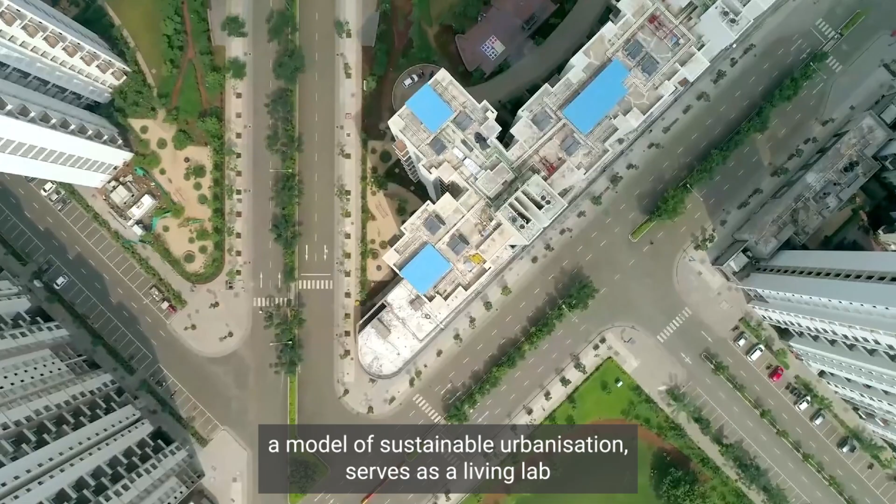Our Palava City, a model of sustainable urbanization, serves as a living lab for the accelerator, enabling innovative and scalable market-based solutions. The thriving community of residents experience about 2 degrees cooler surroundings, 30% lower energy footprint.

Together, let's build a prosperous net zero carbon future for all.

Hi, good evening everybody. I am On Abdullah. I'm from India's second largest real estate company called Lodha. We are a full spectrum real estate developer, all the way from residential, commercial, industrial, and data parks.

Palava is our flagship city development. I should start with why we have built this project. 15% of global growth is coming from India, and India's growth is leading us into an unprecedented scale of urbanization. We expect that close to 100 million households will become home ownership capable in the next 10 years, so it is going to unleash a level of urbanization never before seen in the world.

But urbanization brings carbon emissions, urbanization adds to climate risk, and it also adds to the challenges in energy security. So we have to build in a manner that we can sustain it.

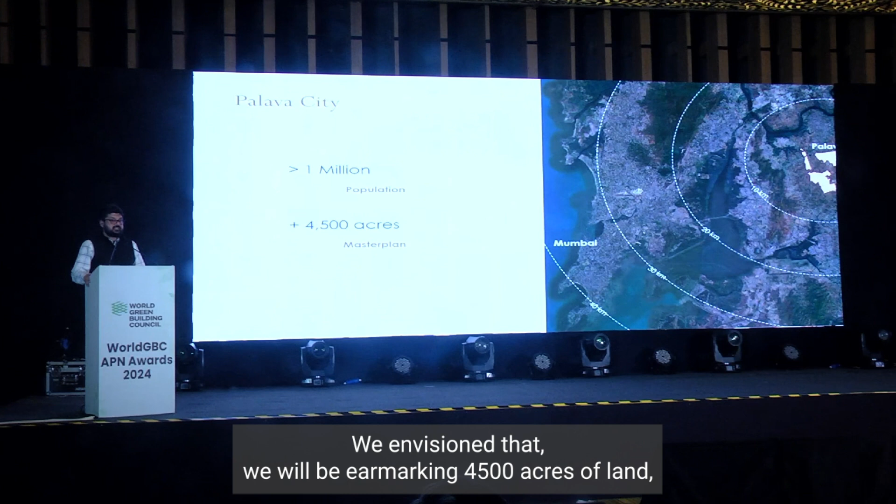The city had to be a template for India, and a template cannot be a small project, so it had to be big. We envisioned that we will be earmarking 4,500 acres of land, and the ultimate population of the city will be 1 million. We have already completed a few initial phases, and the current population in the city is 200,000.

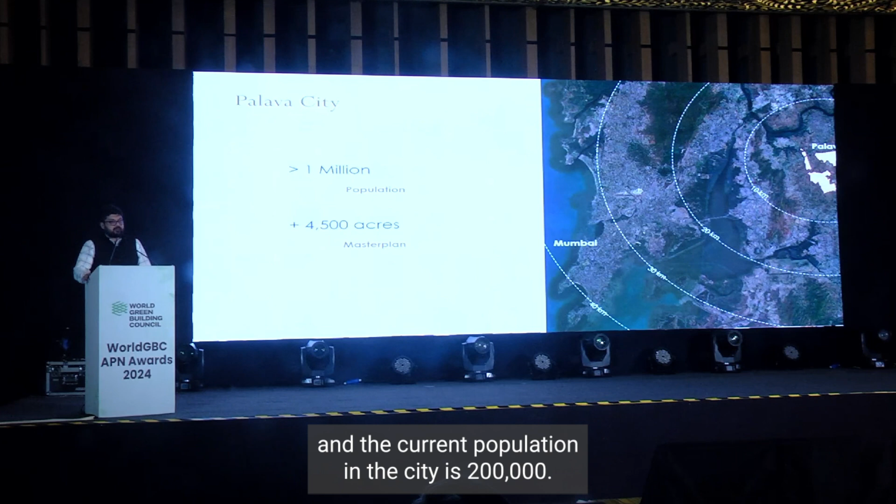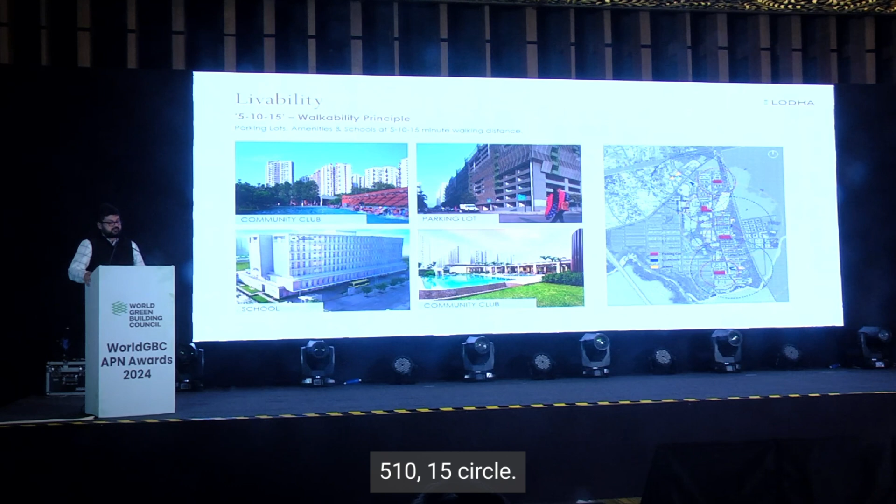So these are some photos of the city. It shows how the neighborhoods are planned. They are all within this 5, 10, 15 circle. Each circle comprises close to 4,000 to 7,000 homes.

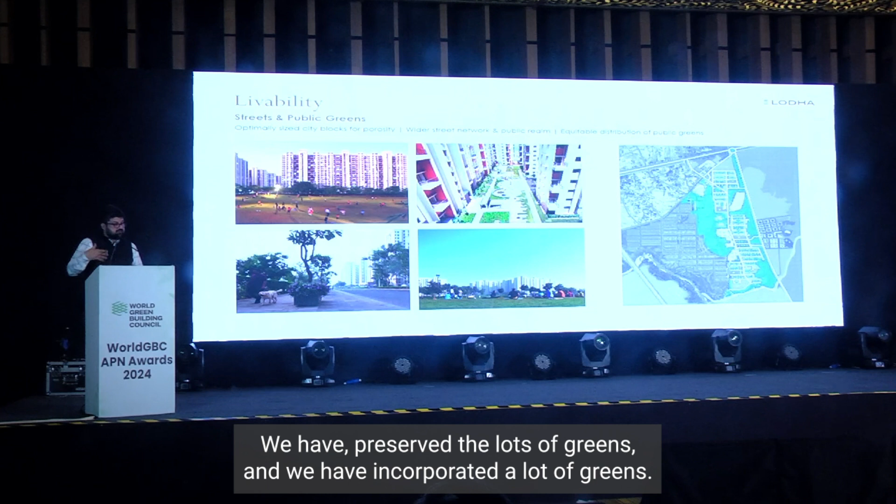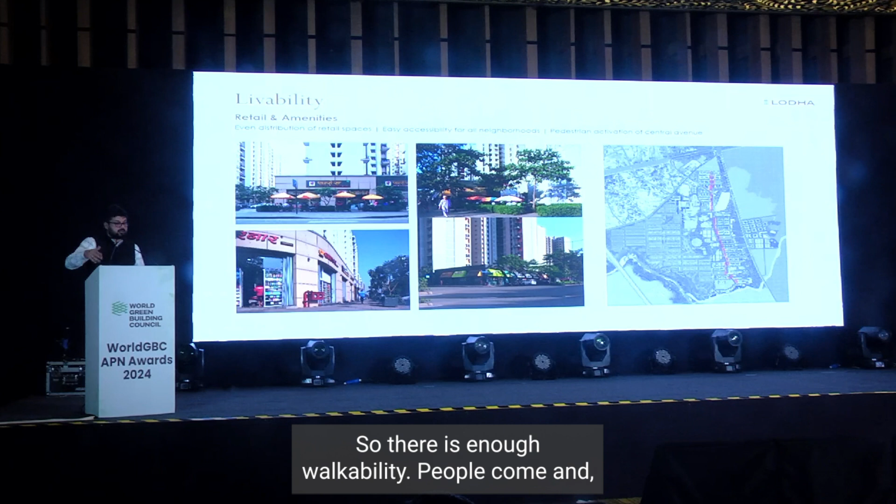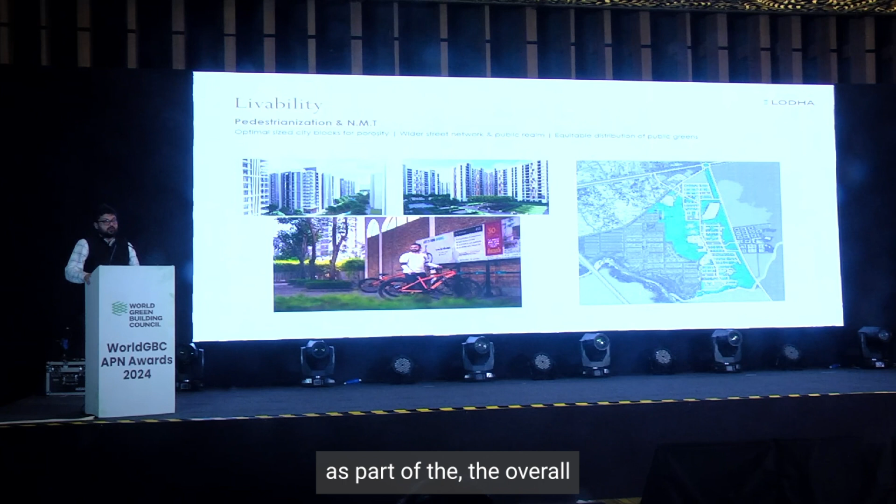There are lots of greens. We have preserved lots of greens, and we have incorporated a lot of greens. The retail is also interspersed all across the city, so there is enough walkability. People come onto the vibrant streets. There is shared mobility, non-motorized transit corridors as part of the overall city design.

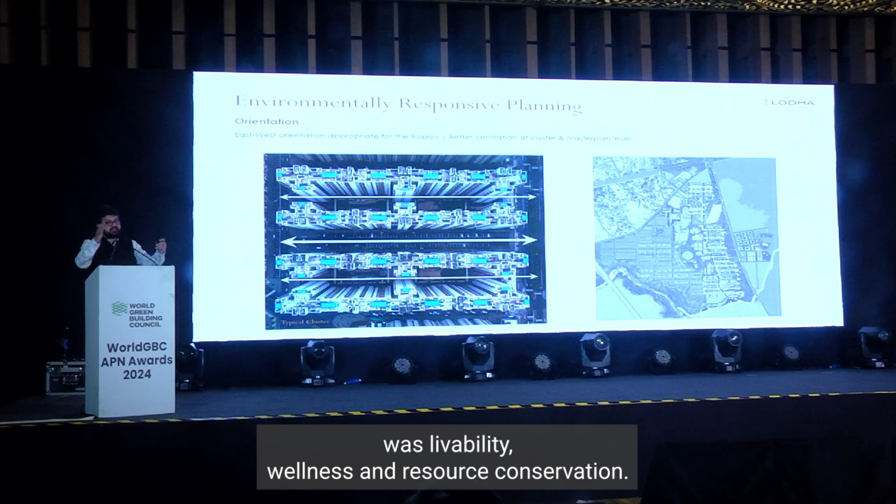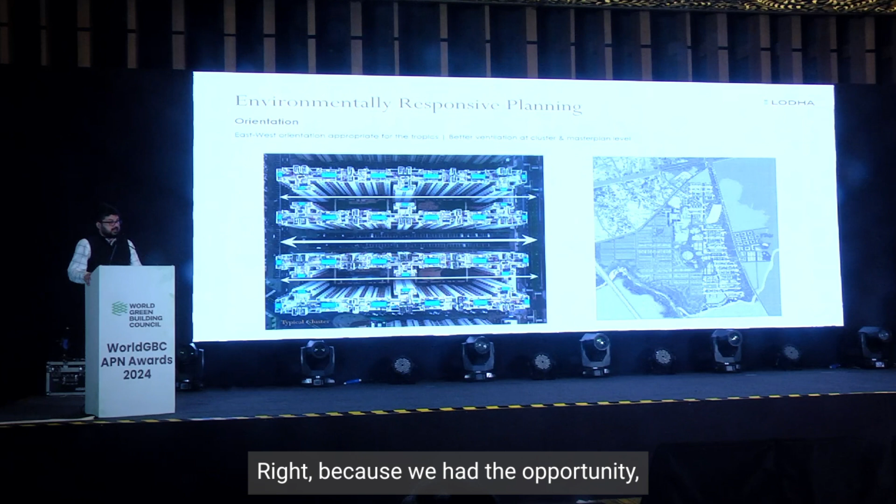As I said, the initial focus on sustainability for this city was livability, wellness, and resource conservation. In resource conservation, the primary thing is passive design. The whole city is oriented right because we had the opportunity, so there is a lot of passive shading also on the streets as well as within the courtyards.

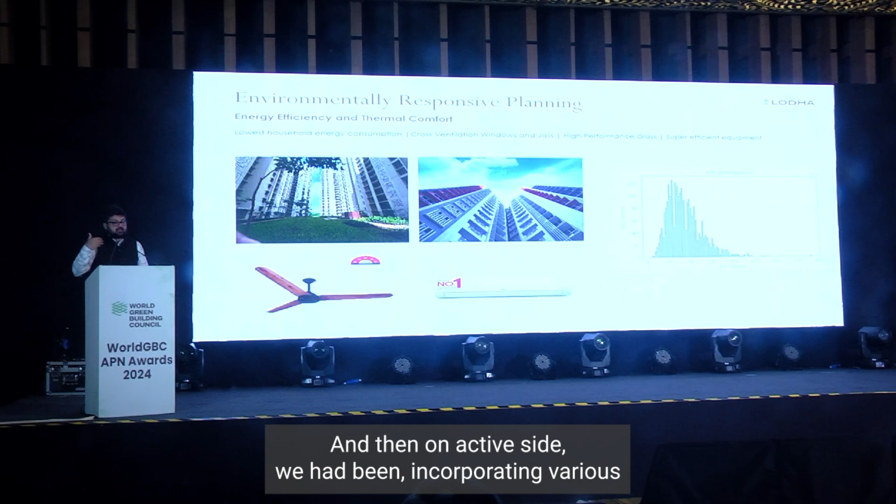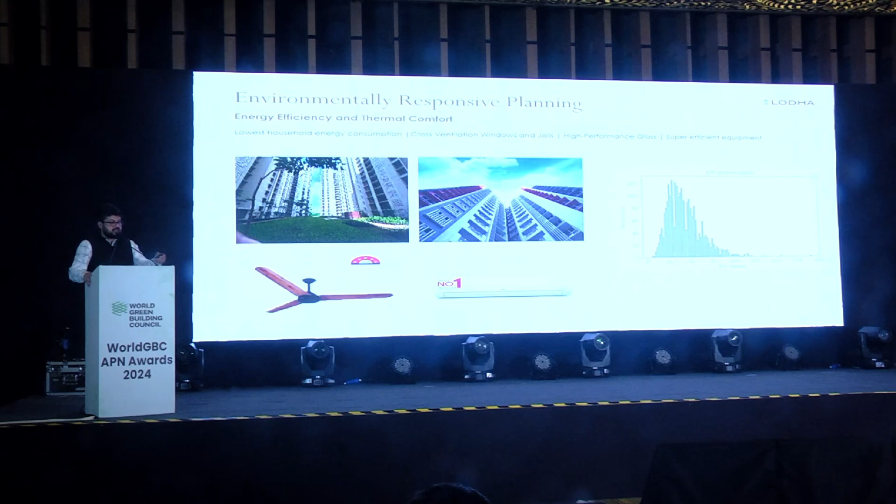On the active side, we had been incorporating various elements, passive and active, including giving super efficient appliances even in affordable homes, which has led to a very impressive energy use profile within the city. A typical home in Palava has a median EPI of 40 kilowatt hour per square meter per year, which is quite impressive, and we are still trying to push it down.

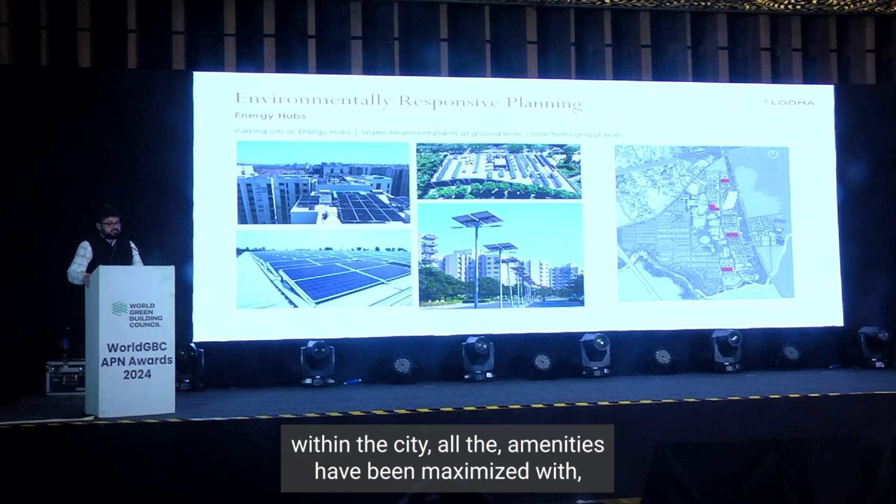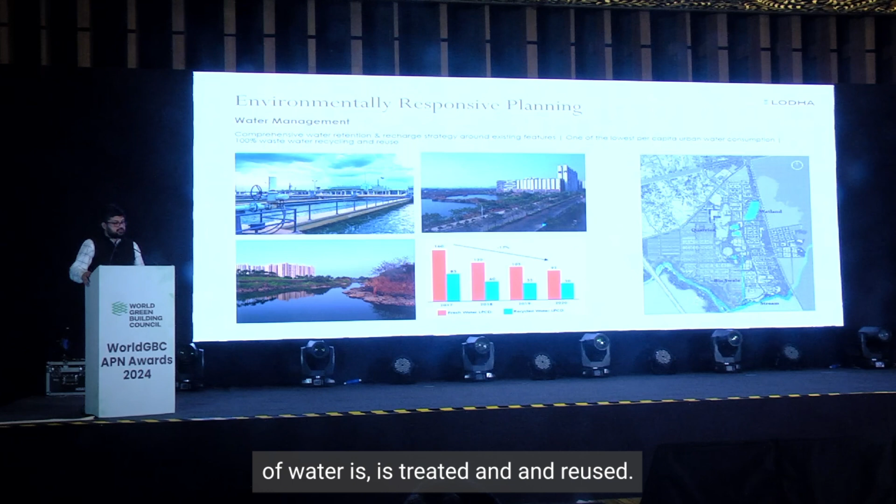There is a lot of solar within the city. All the amenities have been maximized as energy hubs. 100% of water is treated and reused. We have also protected the existing wetlands and lakes. The water is also metered, and the data is conveyed to the customers.

The entire waste is also handled within the city. Beyond this, we also have lots of arts and culture incorporated, and lots of social infrastructure through schools, sports facilities, etc. And then obviously we have a top-notch city governance, where the citizens are also involved.

But 4 to 5 years back, we came together with RMI. They are a US-based think tank on climate and energy. And we started to redefine sustainability for Palava. In this redefinition process, we brought climate risks as central, and we created a strategy built on resilience and decarbonization, basically handling adaptability and mitigation, physical risks and transition risks.

And what it led to was, it added a few parameters which were originally not in our agenda, like embodied carbon reduction, like use of climate risk data and so forth. So these are the newer things that came into how we design.

And we then decided that we'll form a net zero urban accelerator, which will use Palava as a living lab to come up with this information that can guide how urbanization is done all across. And the data is available for everybody.

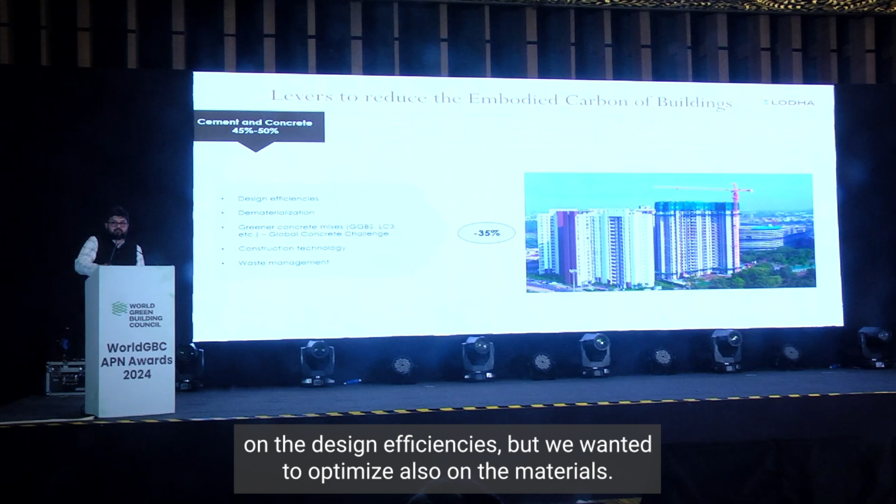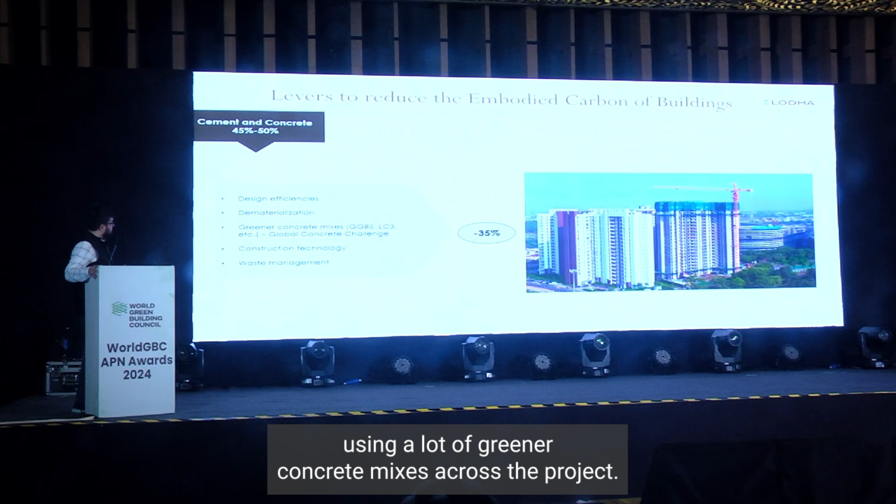We started working with our supply chain. We had already optimized on design efficiencies, but we wanted to optimize on materials too. So we started working with our supply chain, and we have been using a lot of greener concrete mixes across the project, and we are also exploring certain construction technologies which help us dematerialize and bring the carbon down.

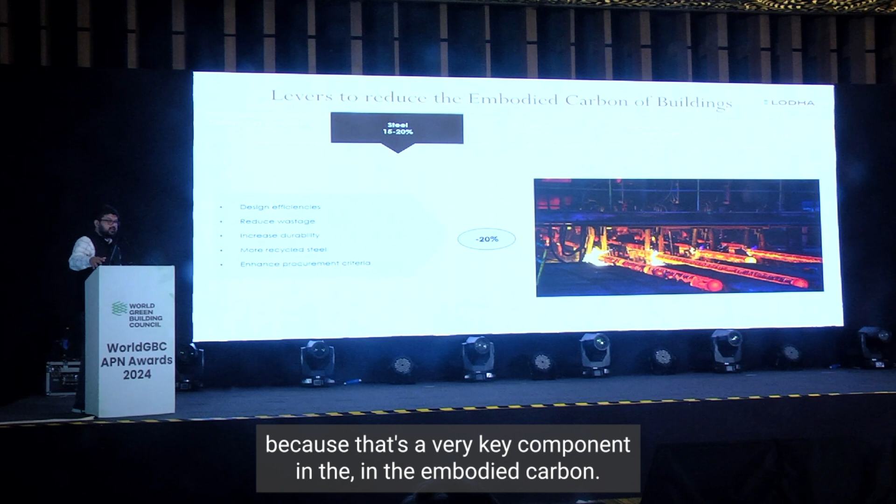We have been working with the steel supply chain as well, because that's a very key component in embodied carbon. We have a paper on this also, if interested people can see. India has a very data-scarce, opaque supply chain, so we are working with all of them to bring them on board on this decarbonization journey.

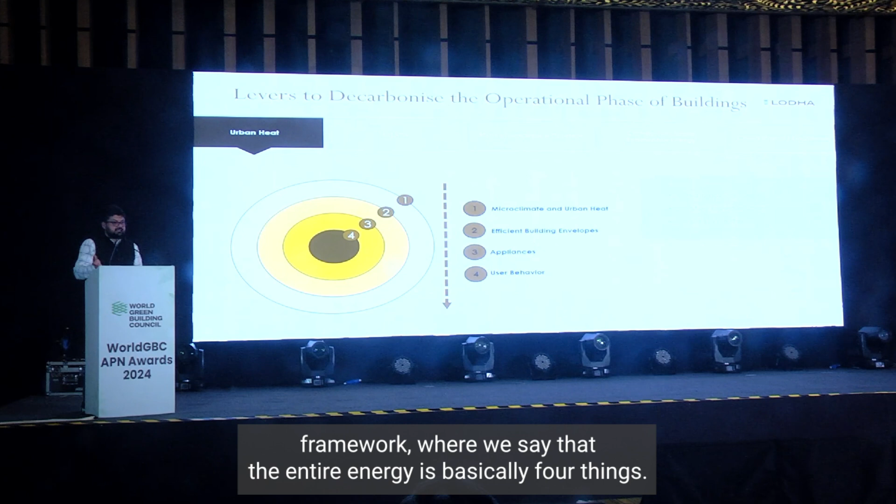On the operational side, we created our own 4 concentric circle framework where we say the entire energy is basically 4 things: the ambient, then inside the ambient it's the envelope, inside the envelope it's the equipment, and behind the equipment is the user. So if we are able to attack all of these 4 areas, we can bring down the energy needs.

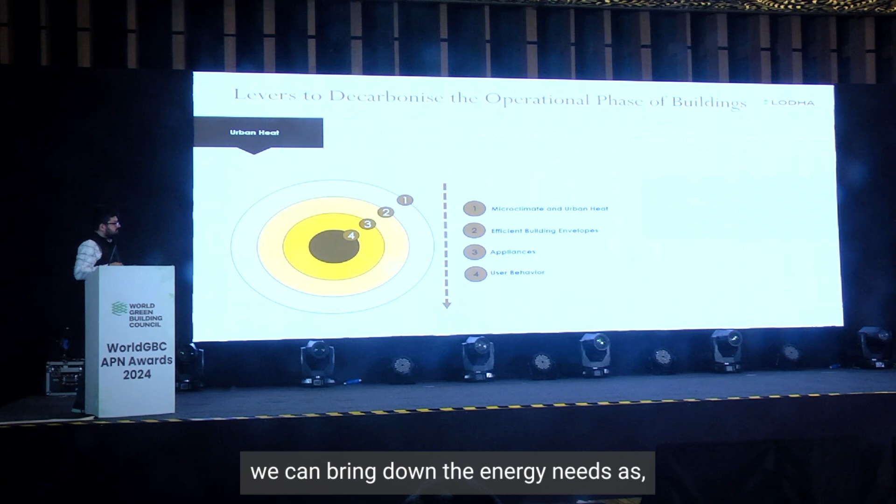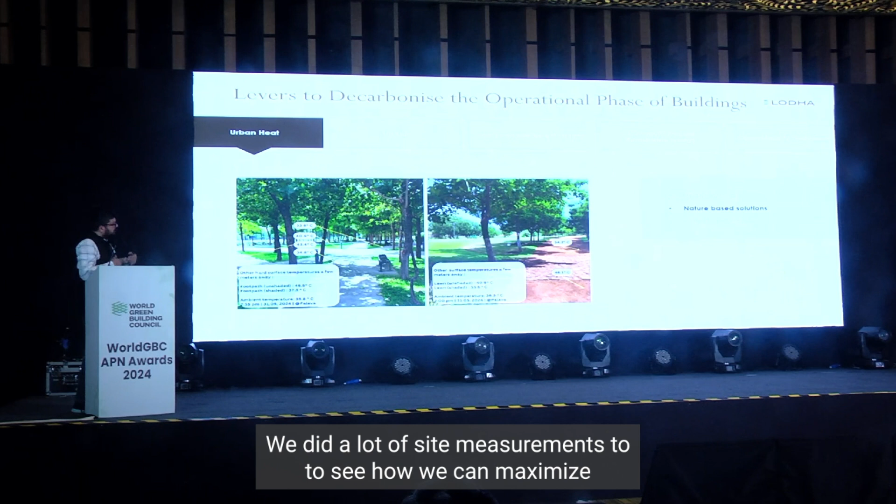So we started with a heat mapping exercise. On the left side you see Palava, on the right side you see the nearby development. It's 3 degrees cooler than what it was before. We did a lot of site measurements to see how we can maximize the right materials to beat urban heat, and how we can have more lighter and more reflective surfaces within the city.

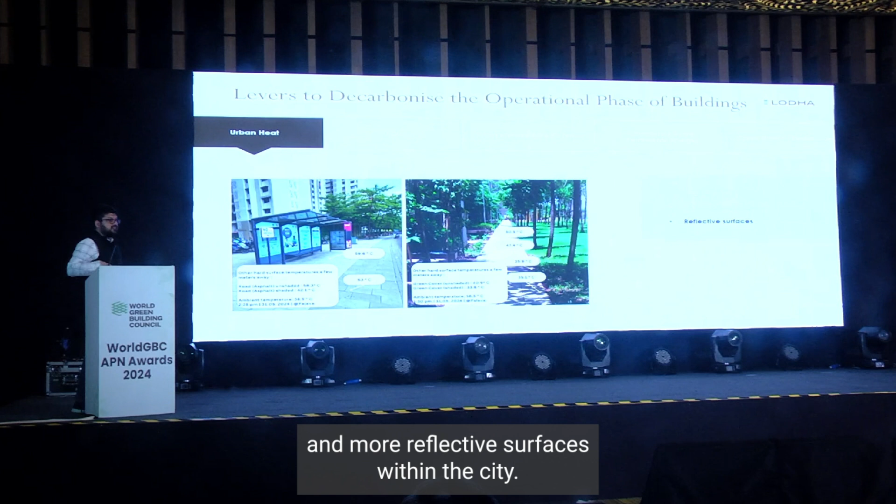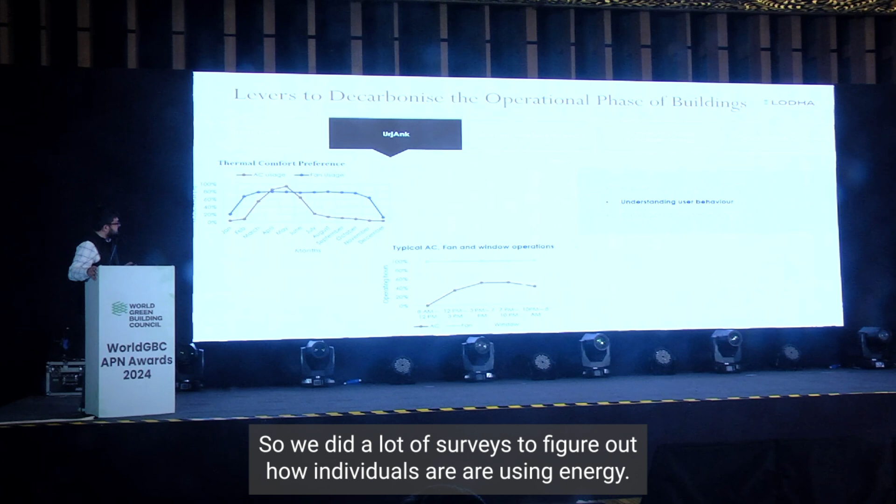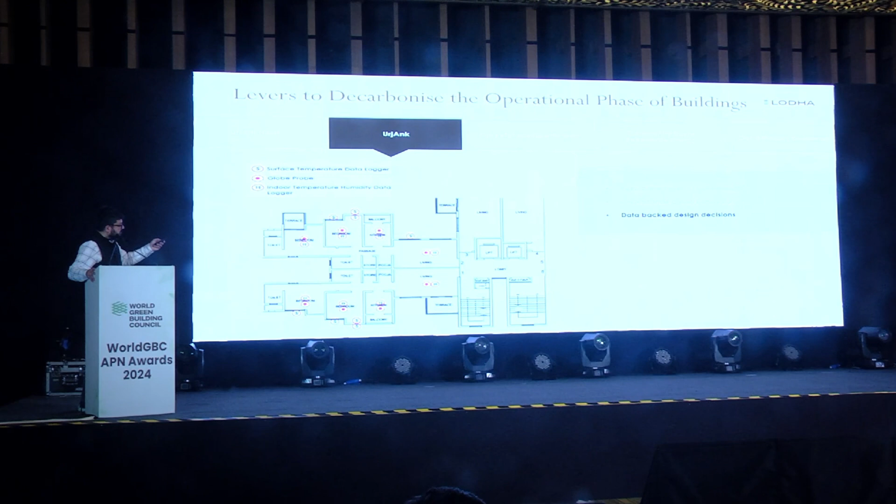We also started to understand how people use energy. So we did a lot of surveys to figure out how individuals are using energy, and then how that can be brought back into how we make design decisions. This is a sensorization of an active apartment where we are really trying to understand how much is going into cooling, how much into heating, and so forth.

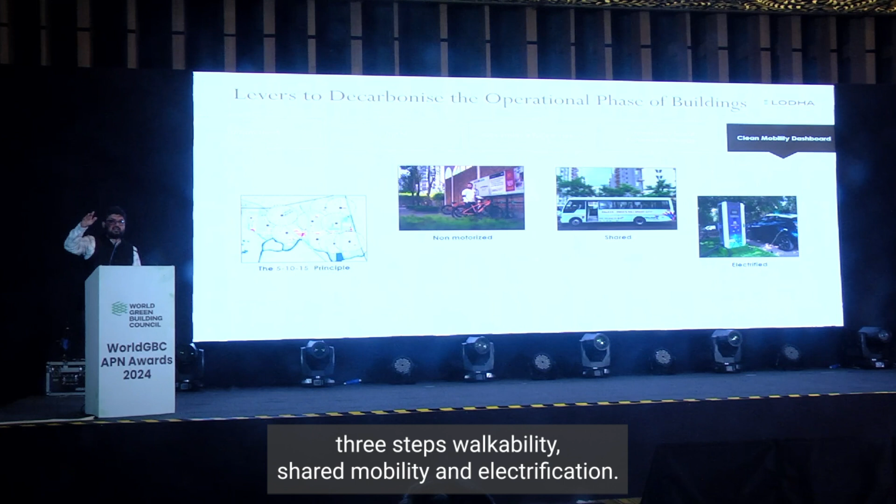We are trying to do community solar integration. We already have close to 10 megawatts of solar within the city, and we are further expanding. Our mobility strategy within the city is basically 3 steps: walkability, shared mobility, and electrification.

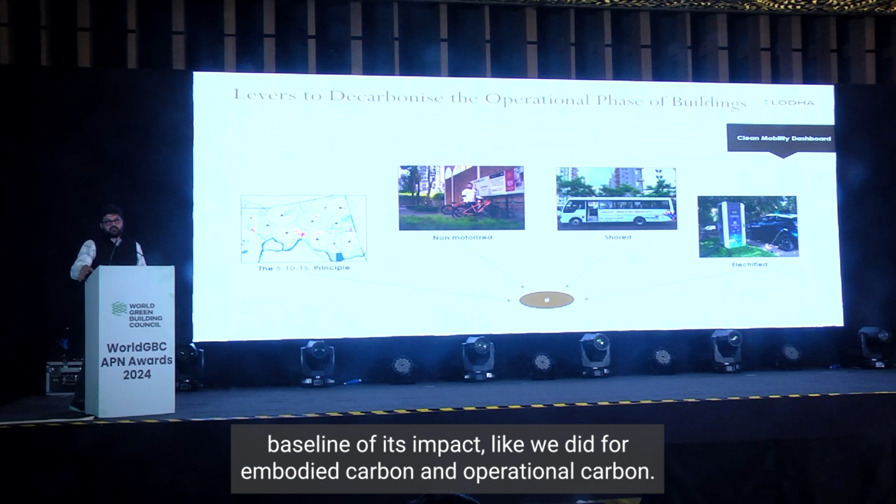We are trying to now create a baseline of its impact, like we did for embodied carbon and operational carbon, so this city then acts as a real basis from which better performance can be cut out.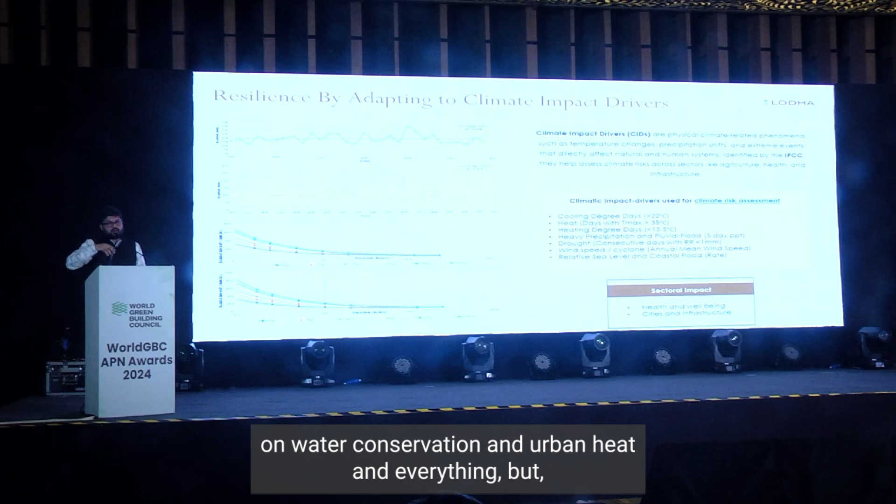On resilience, obviously you saw in the earlier slides we had been doing everything on water conservation and urban heat and everything, but what we have done differently now is we have started to consider climate impact drivers and use climate data for infrastructure design.

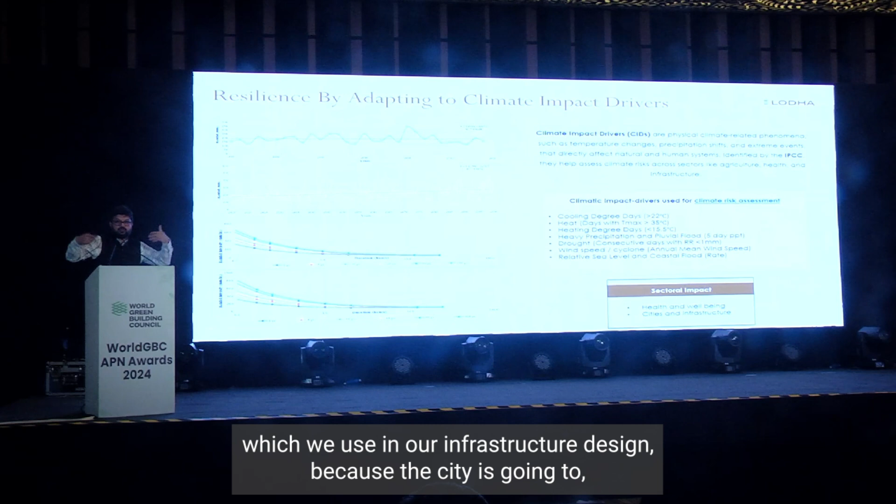So we use global climate models, we run them on IPCC scenarios, and we generate synthetic data that we can use for infrastructure design. These are certain charts which you see for the past and future, and these are the IDF curves. These are the ones we use in our infrastructure design, because the city is going to last longer than this whole transition piece.

All this has helped us perform at the top of various benchmarks. We are #1 in GRESB and so forth. We are one of the largest portfolios in IGBC also. Now I think 56 million square foot is certified and 18 million square foot is under process. The largest bulk of it actually comes from Palava. It's such a huge development that it has many certifications, so there are many parcels which are certified platinum and gold.

So I will end now with this point: what is Palava doing? Palava is not just a simple green building or a green development. India has 300 billion odd US dollars worth of real estate, of which only 30% is built by developers, of which only 30% is built by developers with capacity, who understand the policy and regulation. So the catchment of policy is that, and it will always remain very difficult if only 5-10% of the business is in control of the policies and regulations, what can be done?

So what we are trying to do through our scale at Palava is catalyze it through the market. We are trying to go beyond the project, and attack it at the larger national and geographic level. We hope that through these market-based solutions, we will be able to bring about the change, and through a project like Palava, we will be able to offer a template that can become a basis for the future of urbanization in India, which is going to be unprecedented. So that's it. Thank you.